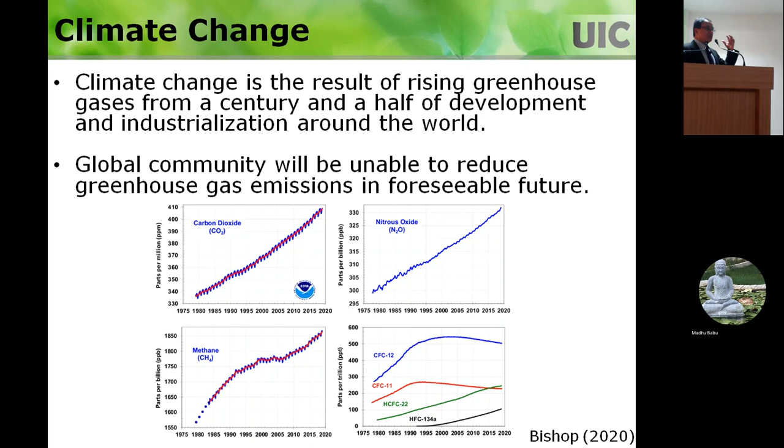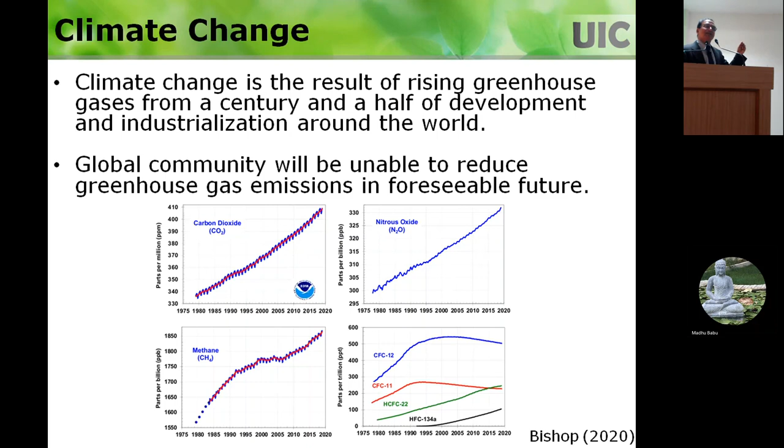The greenhouse gases emitted into the atmosphere are the major problem for this climate change. There's already so much greenhouse gas in the atmosphere that there's no way you can reduce these gases all of a sudden. Even if you shut down all the coal burning power plants and take care of all the dump sites, the existing atmospheric greenhouse gases are going to show impacts for many years to come. So there are two things: if you don't reduce the greenhouse gases, the problem is going to get worse and worse. The greenhouse gases are already very high, and the impacts are going to continue into the future.

So what are the climate change impacts of these greenhouse gases and global warming? These are the problems we're seeing now: sustained changes in average temperatures—some places extremely hot, some places extremely cold. For example, in the last two to three years, the highest temperature ever recorded in some parts of Rajasthan, never recorded before in the history of the planet. You'll see some places extremely hot, some extremely cold, and remember my talk today—in the future you're going to see even higher temperatures than what we're seeing these days.

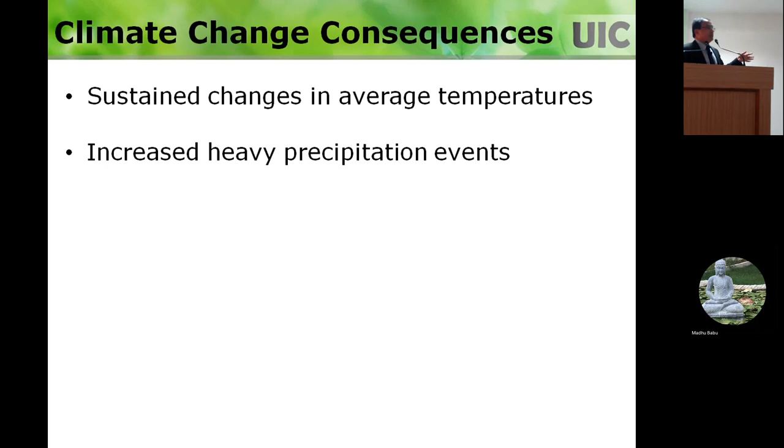The increased heavy precipitation events—you'll see a lot of rain, storms, with higher frequencies and higher intensity. Suddenly the rain comes hard, stops, and keeps on happening like that. These things are happening now, things that never happened before.

Just an example, Hyderabad never flooded, inside the city, never thought it would be flooded. And it happened recently, and many parts of India are getting flooding that was not common at all. So if you're a civil engineer designing something, if you look at the history, there's no precipitation issues, no flooding issues, so you assume that and design it. But now this flooding is becoming common, so as a civil engineer you need to design for these new flooding things that are going to happen.

Increased coastal flooding. People along the coastal area are going to be impacted significantly because of the sea level rise and also the big surge that you're going to have. So lucky that you're not along the coastal area. If you were, I would have advised you to move somewhere inland, sell your property and move. Bhimavaram is one of the areas where it's going to have a lot of impacts in the future.

So in the US, a lot of things are happening along the coastal area. ASCE is thinking, hey, we cannot move a lot of people from coastal areas, what can we do? So ASCE has the vision of having floating cities, cities in the water. Go to the ASCE website, type floating city. They're coming up with a concept into the future. You may have floating cities, where all the buildings are in the water, and all the roads and transportation, everything is underwater. So that's the kind of thing that's coming up into the future.

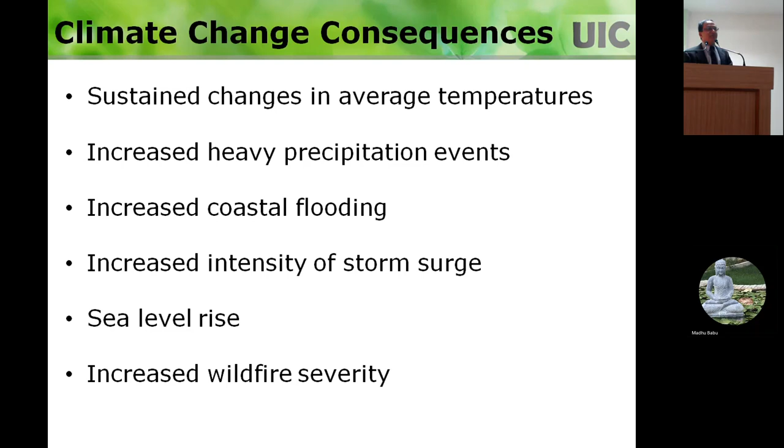Increased intensity of storm surge, as I mentioned, in the coastal areas, the sea level rise. And I don't know if it's common here or not, but in the US, a lot of forests are on fire. Never before have we had so many fires. California, if you have any friends or relatives there, whole California is burning. A lot of expensive houses in these hilly, wooded areas are all getting burned out. So a lot of issues with these things.

So this is the problem. Just to give you an example of what could happen: if you're in a coastal area, the sea level is rising and storm surges are happening, and if you have a roadway along that, it's going to get damaged. So what I'm trying to say is, as a civil engineer, these things are going to happen more and more in the future, and now you need to design for that. Your textbooks don't tell you how to do this. This is something emerging into the future, and we are trying to develop methods that we can use.

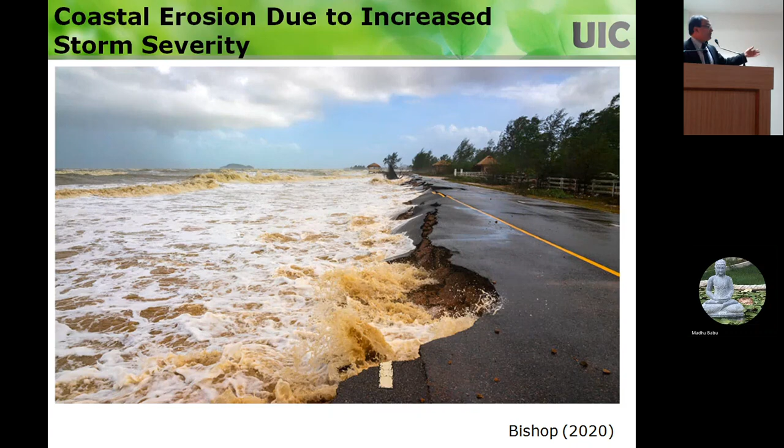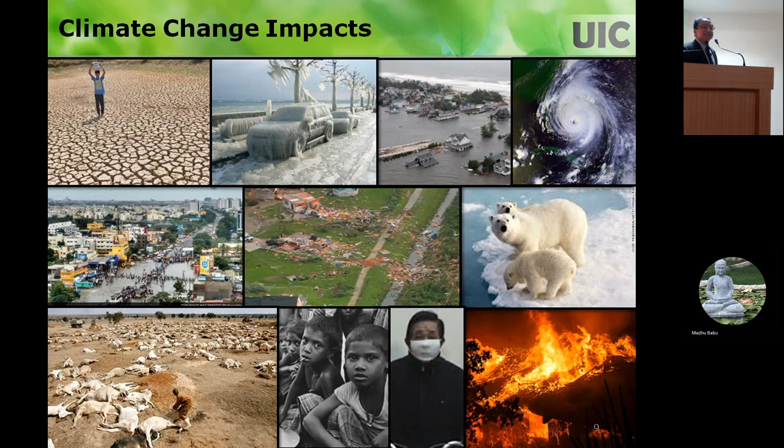So that's why we need to worry about the climate change impacts. I just put some pictures of India — India has to face these climate impacts going into the future. There's Maharashtra, Kerala, Tamil Nadu. In Maharashtra itself, you can see some places extremely dry. So these things are happening — how would a civil engineer design the buildings, design the bridges, design the dams? We really need to do this, otherwise we're going to see a lot of damage.

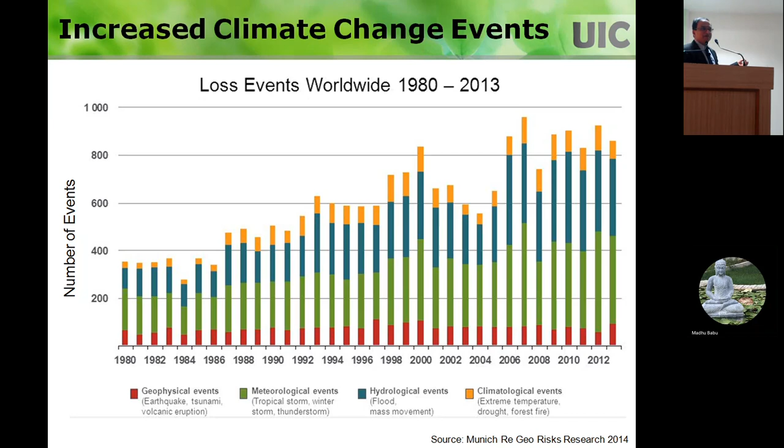If you add up the number of these extreme climate change impact events, they are increasing every year. Even with new data showing even higher numbers, we cannot ignore this. It's not just happening one year and going away, it's continuing to get worse.

When these things happen, there's so much damage, so much financial loss. And if you look at these trends, they keep going up.

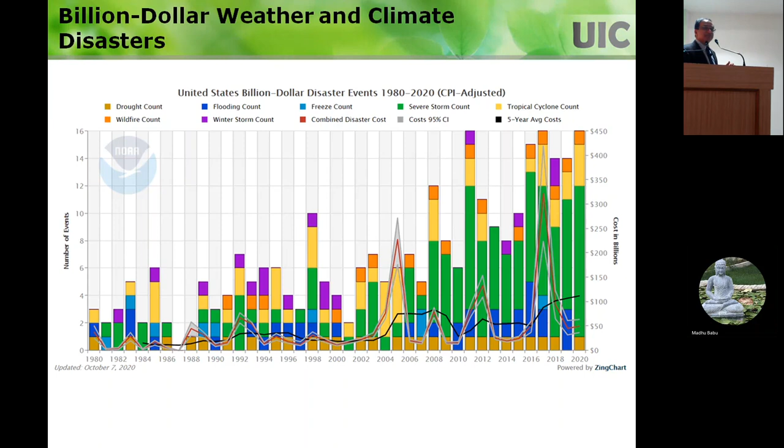If you want to learn more about climate change, the authentic source is the Intergovernmental Panel on Climate Change, IPCC. If you're writing a paper or want more authoritative information on climate change, it comes from the IPCC. They assess the climate situation every 5 years and write a report. This report came out recently - it's the 6th assessment report.

These are all independent scientists. This is not a political agency or a government agency, it works under the UN. The group of scientists collect all the available scientific information and provide a summary of it, showing that the situation is really getting worse.

CO2 concentrations are at their highest, sea level is increasing really fast, the ice is melting really fast, and as a result we are having all these impacts - extreme heat, heavy rainfall, drought, all these things are happening.

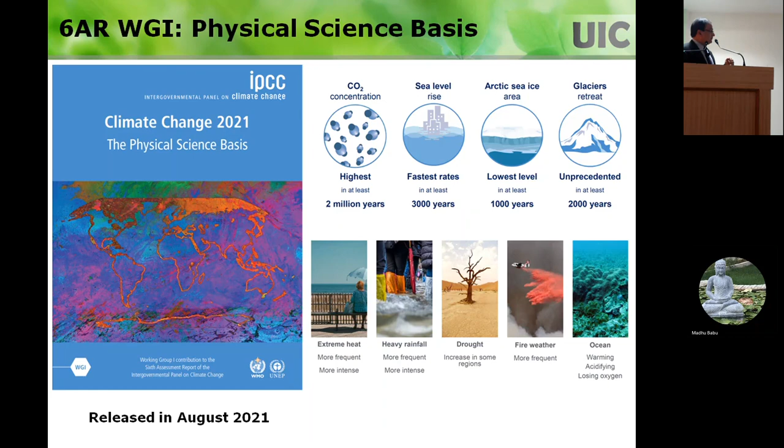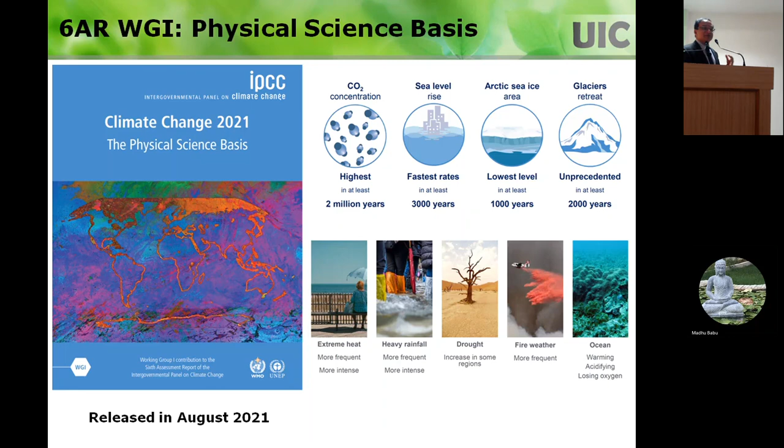If you look at this report, it's depressing. You wonder about your safety, your survival on this planet. This is going to be bad.

They projected what will happen in the future - this shows their predictions, and a lot of people use this as authoritative information. Over time you can see the greenhouse gases are going to increase, and the temperature is going to increase. This temperature increase shouldn't be looked at like daily weather temperature - this is the global average temperature. Even a change of more than 0.5 degrees really creates havoc.

They looked at different scenarios, from a low CO2 emission scenario to a high CO2 scenario. No matter which one you look at, it shows an increasing global warming effect. If you have increased global warming, that means you're going to have more and more of the issues I mentioned. This is really a problem, guys, going into the future.

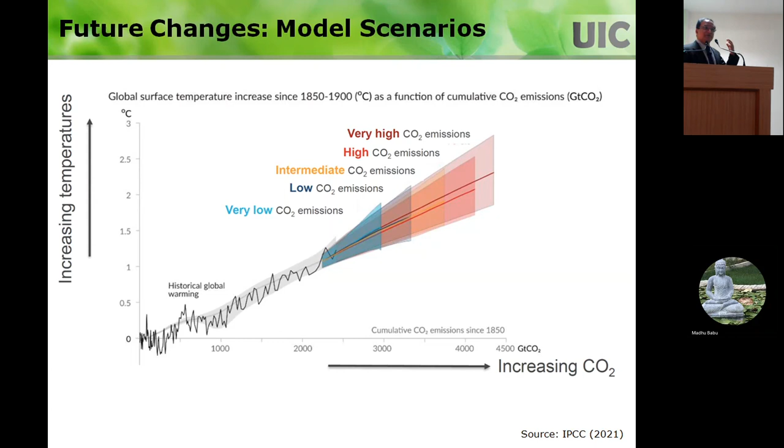It's not just about us - you are going to be forced to tackle these kinds of problems into the future. The IPCC said we need to address the impacts, adapt to vulnerability, and look at addressing the mitigation of climate change. A lot of things have to be done to address this issue.

You've probably heard about sustainability and sustainable development goals. Going into the future, if you want to maintain quality of life for current and future generations, the UN came up with these goals - focusing on gender equality, education, and also climate action. Future sustainable development is not possible if you don't address climate action. This is important, and everybody is trying to work on these things, including climate action.

Hopefully that gave you an idea about climate change, its impacts, and the role of design professionals. Now the question is: if you are a designer and you don't account for these climate changes in your design, what are the implications? What are your liabilities? That's the big question being asked.

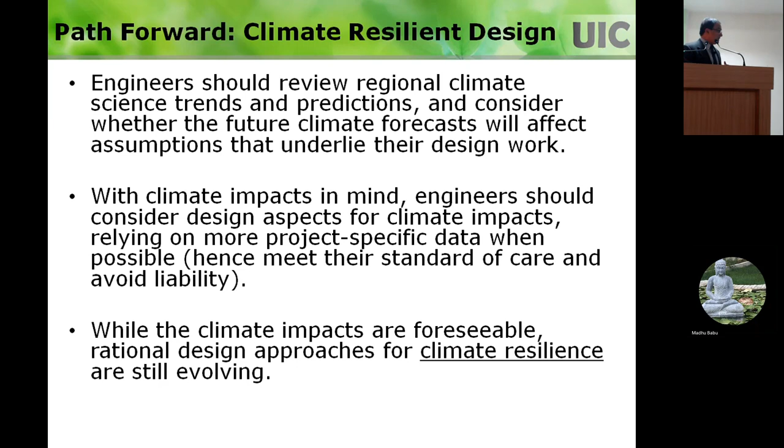And one of the biggest challenges is that these climate impacts have a lot of uncertainty, in terms of what could happen at your site. So this climate resiliency, basically withstanding these climate impacts, is still evolving. So how do I design it, right? So this is the concept of climate resilience, okay?

Just pay attention to this one, because a lot of times we design for performance, okay? This is what we assume - that nothing is changing and the design is performing. But now, if the climate impact happens, let's say there is a climate impact, what happens is you're going to have some damage to your structure. But hopefully you don't want it to collapse completely - if it collapses, then it's really bad. You want to design such a way that after that extreme event recedes, the performance comes back to some level, maybe not necessarily the same level, but a satisfactory level. Ideally, you want it to recover to the same level as the initial level, or even better.

Now the question is, how do we do this? How do we design it? How do you design a building? How do I design a bridge? How do I design a bridge if there is extreme flooding that happens, if there is some damage that happens - how can it come back to its original performance or even better performance than what it was originally designed for? This is what civil engineering professionals are being asked to design.

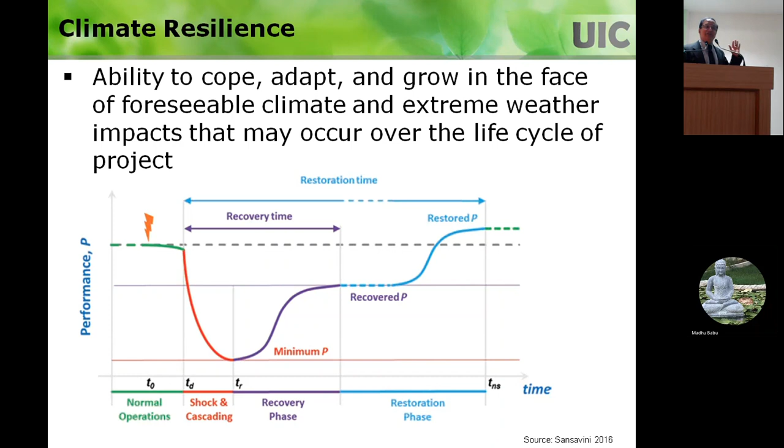How long is the project? These civil engineering projects are long term - 50 years, 100 years. We design a bridge, we think it's going to last for 30, 40, 50 years. So during that time, we need to anticipate what climate impacts are going to happen, and then we need to make sure that our bridge is safe.

So how do we do this? Let's say you want to do the climate resilient design - how do I do this? There's no good framework that has been developed yet, okay? There's no code, no guidance. This is still evolving. So this is one of the frameworks that I proposed some time ago. This is how you follow the procedure: you identify climate change hazards of concern.

Okay, you know the location where you're going to put your project, right? Let's say in your campus, or in Hyderabad, or in Chennai. Each location will have different climate change hazards. In Chennai, I might worry about coastal impacts. In Hyderabad, maybe flooding. So you have to identify exposure to specific climate change hazards of concern, and characterize that exposure. If I have flooding, what kind of problems will I have for my structure? You evaluate the system performance due to the specific climate change impacts you've identified.

It's like when you're designing, you take the load, right? Design load. So this is like, what are the climate impacts that I need to consider in my design? This is called vulnerability assessment. You'll hear this word quite often in climate change designs. You need to really think about what climate impacts are going to happen at the site you're planning to build, and then assess those impacts.

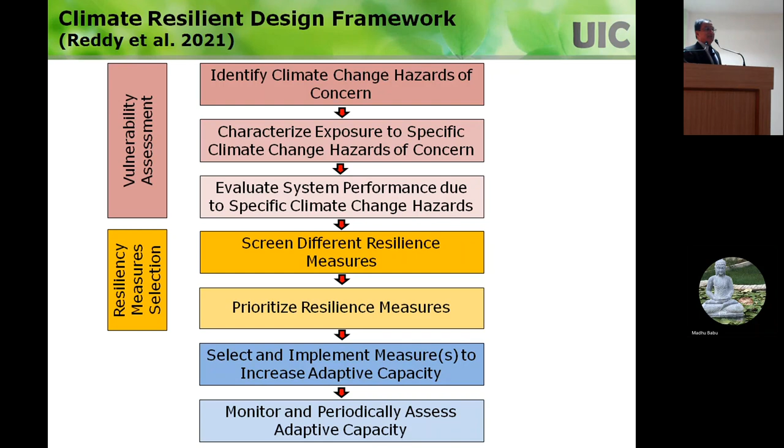And then you implement that. So when you're building, say, a bridge, in addition to the conventional design, you incorporate these resiliency features and increase the adaptive capacity. But there's no guarantee it will perform well, because there's a lot of uncertainty in these climate hazards. Maybe you expected medium level flooding, but there's now much more flooding than expected. So the only solution is you implement remedial strategies based on whatever exposure scenarios you considered, but you keep monitoring it with time, to see if the climate impacts are changing, or if they're less than what you incorporated in your design. This is called adaptive capacity evaluation.

So these are the three things you have to do going into the future to address climate resiliency. All of this requires engagement with the stakeholders. Stakeholders could be public, planners, designers, and owners.

Why do you need this engagement much more than the conventional design approach? Because in this one there is uncertainty and risk. You need to communicate the risk, because you don't want to account for an extreme event that may or may not occur. You don't want to spend a lot of money making your design very conservative, spending unnecessarily. If that thing does not happen, you wasted your money. So you will always design less than the very conservative scenario you think of, but there is a risk.

Risk means the assumption may not be correct. You may have a severe situation, and under that severe situation, you may have more damage. Be prepared to have this kind of damage. That damage could be minimized by periodic monitoring and retrofitting as we go further. So here are those things whatever I mentioned, these are the words about it.

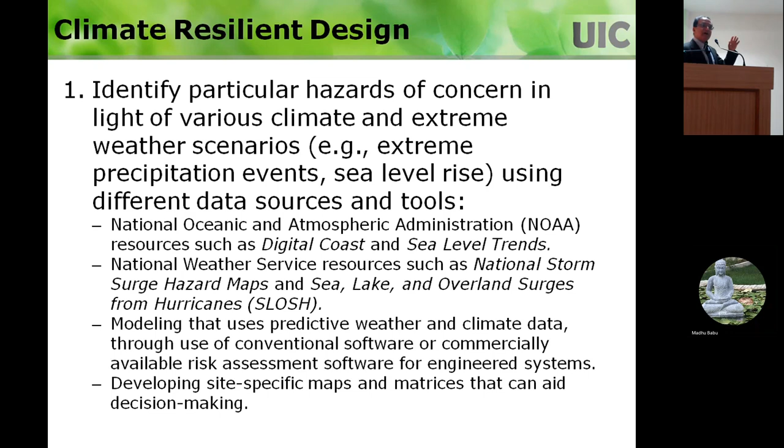How do we do it? One question I want to mention is, how do we find, if I have a location, what kind of climate impacts are going to happen at that location? You need to go into these databases, specify your location, and find information about flooding, sea level rise, or surge protection. There are a lot of resources that can be used to get the information you need. This is not typically done in civil engineering, but we are now forced to address these things.

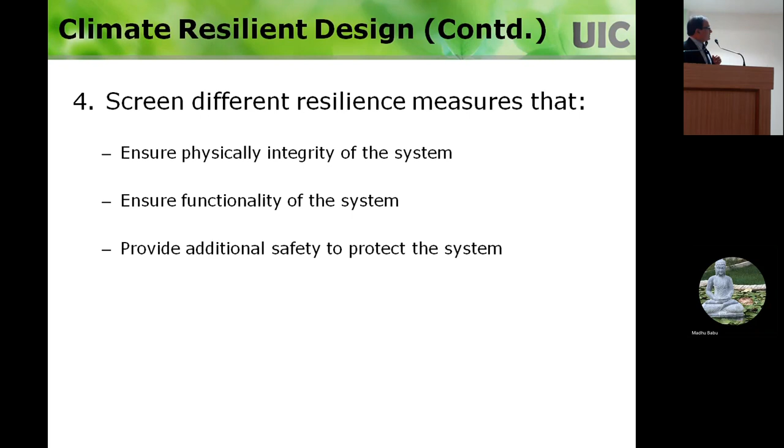So let me just skip some of these things, which are kind of the same as what I mentioned in the flow chart, but then I want to go into case studies.

Okay, I just want to give you some examples so that you can understand how this can be done.

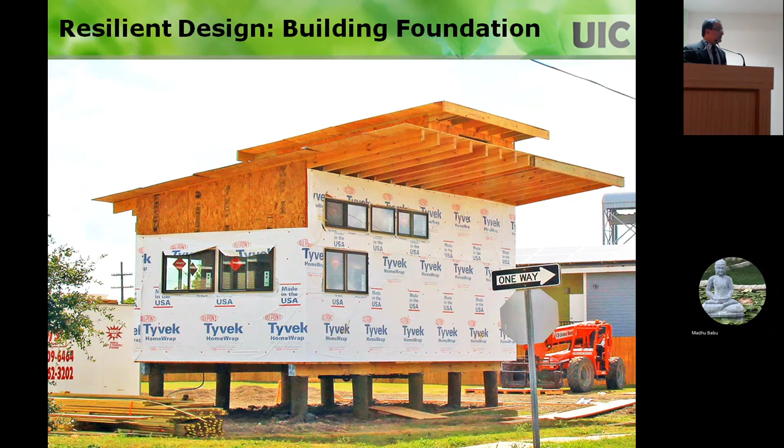So you're trying to address the future impacts now, as a result of this. This is actually built, and also for flooding, you don't want a lot of water accumulating, so there's a lot of emphasis on green infrastructure to infiltrate the water and not allow any accumulation.

So let me give you another example of climate resiliency. In California, there's a train line that goes like this. This has already been designed, and this is what is existing. Look at it, where is it? It's right next to the coastal area. And as I told you, with climate impacts, the water level is going to rise, and you're going to have a surge. They predicted this at this location.

In the future, the train line is going to be inundated with water, it's going to be submerged. How will the train go? So this is what we are thinking about, climate impacts, designing for climate impacts. This is the existing one. How do we address this?

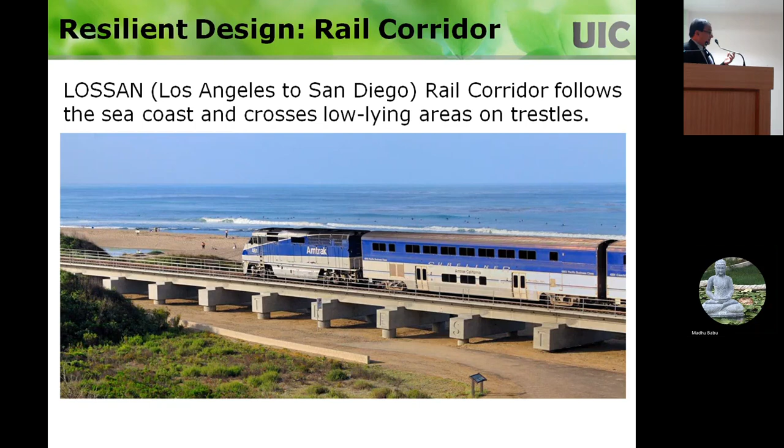You can tear down this one and build another one higher than the expected sea level rise. So we are civil engineers, or creative thinkers, and they came up with this design plan. Right now you have the pile foundations and piers, and this is supporting the track.

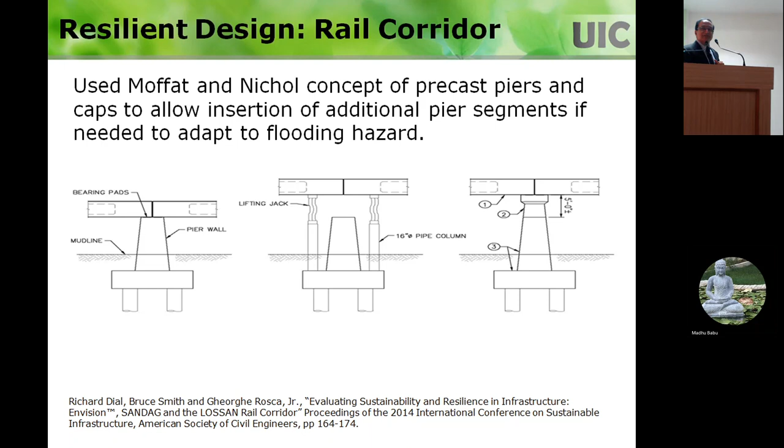So what they want to do is lift the track with jacks like here, and then increase the height of these piers. So instead of being at this height, now it's going to be much higher, higher than the expected sea level rise. So now the train can go on this, and the water level could come all the way here, it doesn't matter. Okay, you guys understand? So that's how we are looking at climate resilient design going into the future.

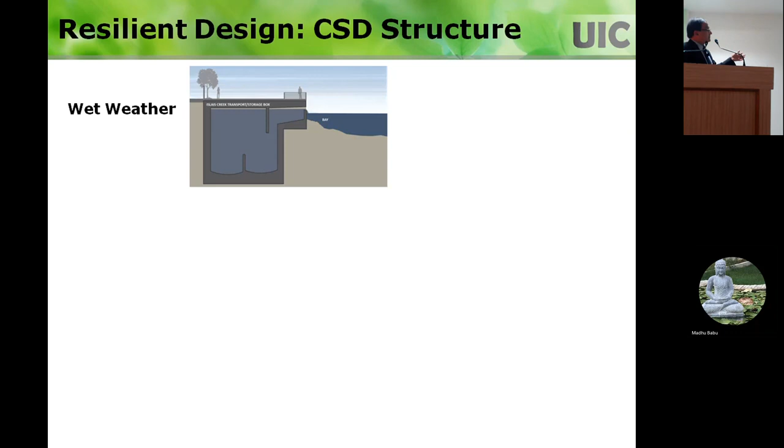Let me show you another example. This is a project being done in San Francisco, California. This is a stormwater project. So you have stormwater, all the rainwater that gets collected in the cities, and they put it into underground pipes.

And then they discharge into the bay. So during the rainy season, there's a lot of water on the roads. They put it into these underground pipes and discharge into the bay. So when it's raining, you're able to address the flooding problems in the city, and discharging into the bay is not a problem. If it's very dry weather, there's no water in the city and no impact on the bay, so there's no issue of water transferring from one location to another.

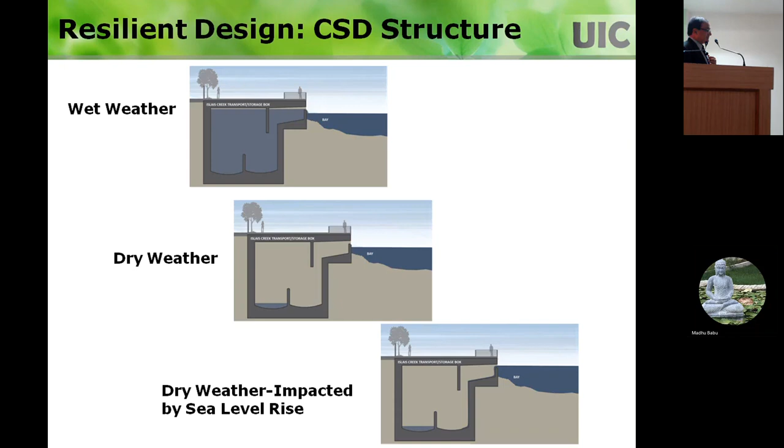So now what they are doing is, when the water level rises here in the bay, the water goes into this system and is stored, and then discharged. So then the water level in the bay will never increase, and it doesn't matter whatever you're doing in the city, because that's not going to be flooded.

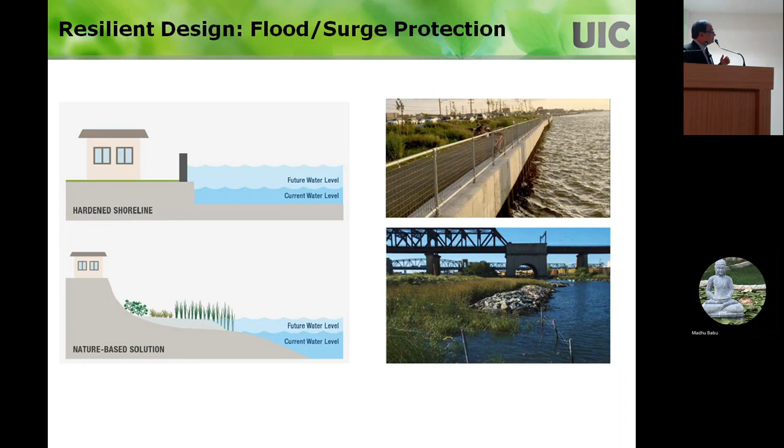So there's a lot of effort now. This is climate resilient design; this other one is not. These kinds of things are going on extensively in the US, and I think other countries will follow soon. As usual, if buildings are close to the coast, they're going to be inundated and suffer a lot. So they are now moving people up-gradient and creating these parks.

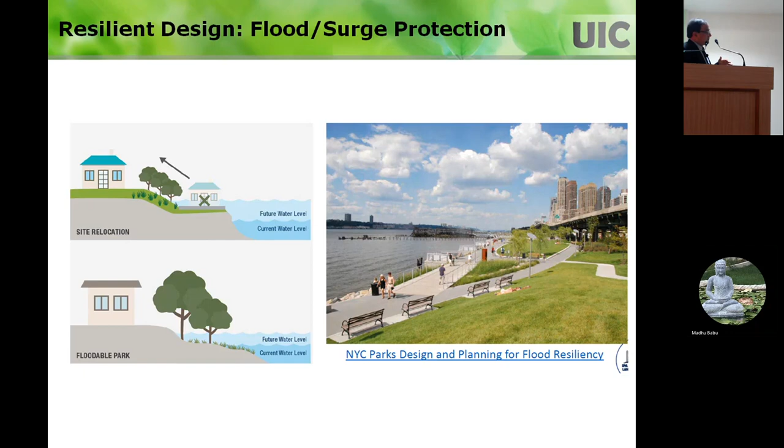And this is the park that they are proposing in New York. You see this one? This is all park. If the sea level rises or there is a surge, this water is going to be in this area. New York has learned hard lessons and wants to do something about this issue. Hurricane Sandy really flooded the entire city, damaging the subways, roadways, houses, computer centers, data centers—everything got damaged because of this unexpected hurricane. They never expected it. Now the city is really planning so these things will never happen again.

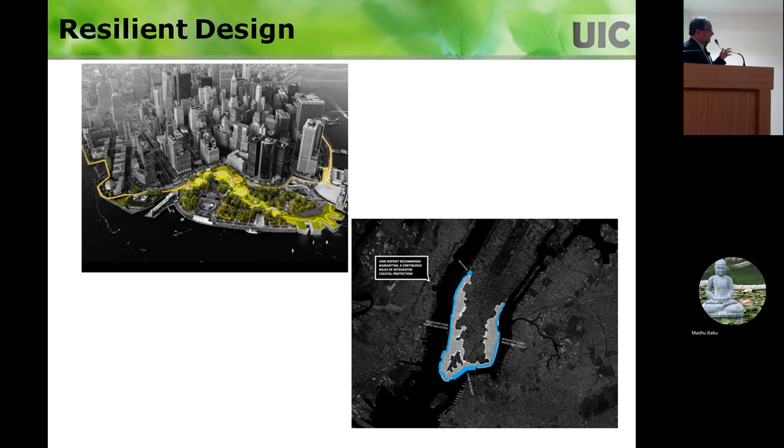With climate change impacts, there's a chance this could happen more often. So they modeled it using different climate scenarios and found that this marked area is vulnerable for flooding. This is where hydrological modeling that civil engineers do comes into use. In that vulnerable area, they are planning to build these parks. They don't want any building in this area, and they want to build these kinds of parks instead.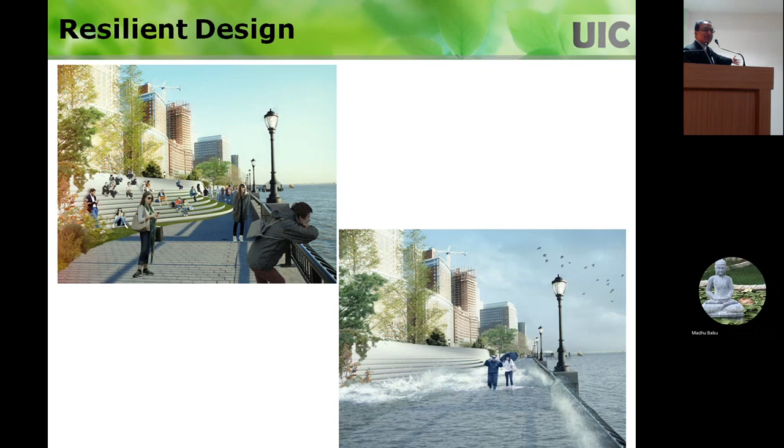So you see this one here. Suddenly, let's say sea level has risen or a surge came. Everybody goes home, right? The water comes here but does not spread to this side, the city side, because this is serving as a retaining system. It's stopping the water from entering the city. You get it? That's the beauty of this one.

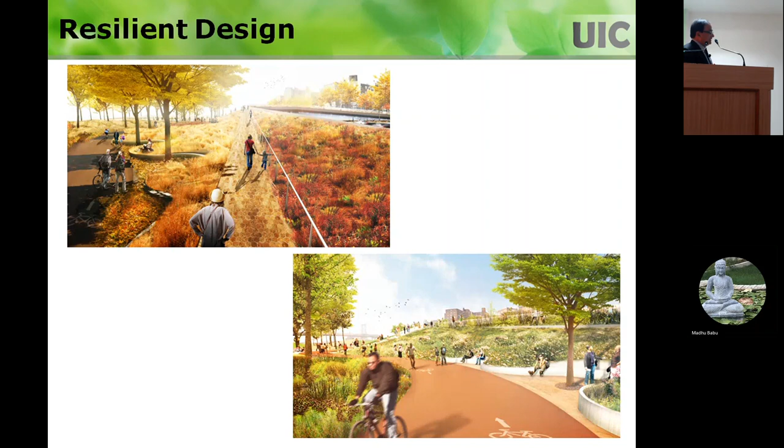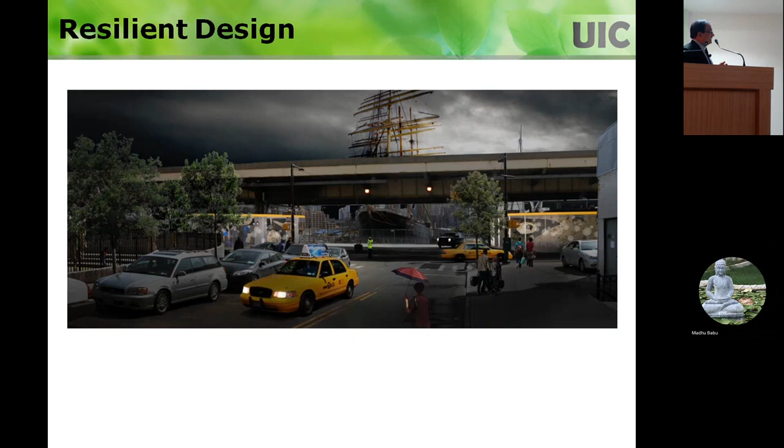Looking at these parks along the coastal areas, there are a lot of them, and you see this height—that's mainly to retain the water if a surge comes or sea level rises. In fact, again in New York, it looks dark here, and they have gates to close off water coming into the city—watertight gates. And look at this one: this is the sea level rise side, this is the city side, and this is the overhead train that goes around.

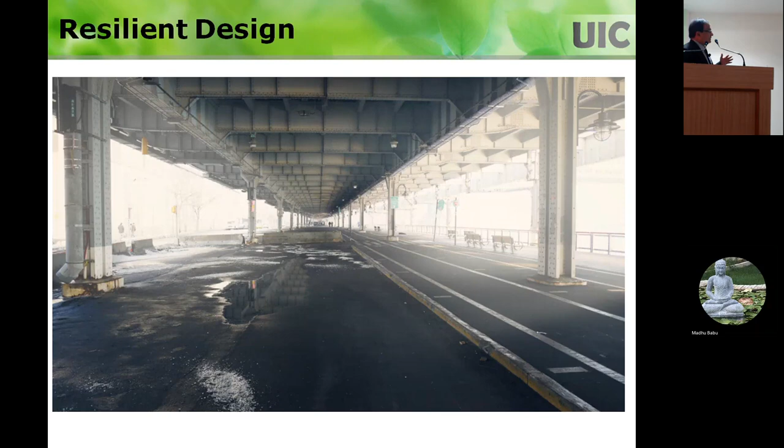Look at this really bad area. Whenever the water level rises here, surge comes up here, this gets water here, and the city gets damaged.

Now this is the plan. They want to convert this whole area that you saw into this, so the public can use it. It's a very nice area to use.

This side is the ocean, and look at what they did on this side, the left side, the city side. They put these stairs. So what happens if there is a sea level rise or slight surge? It gets flooded in this area, and this serves as a containment system. It doesn't allow water to go to the city side.

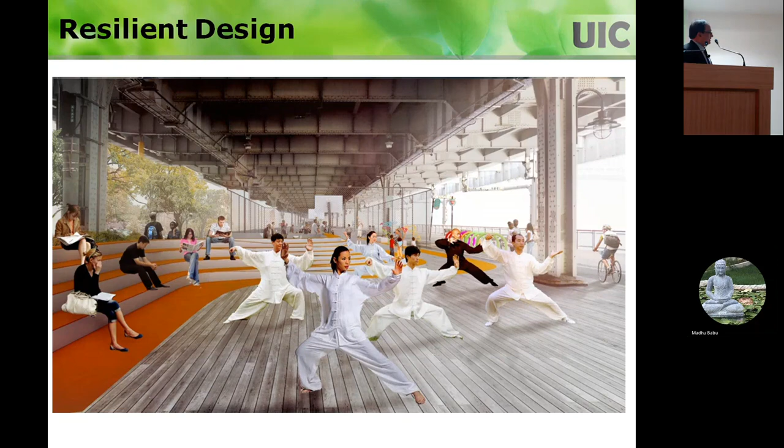And when water comes, everybody goes home, but this protects it. See here, so this is kind of how it happens. Water comes here, and the city is not allowed to flood because this is serving that purpose.

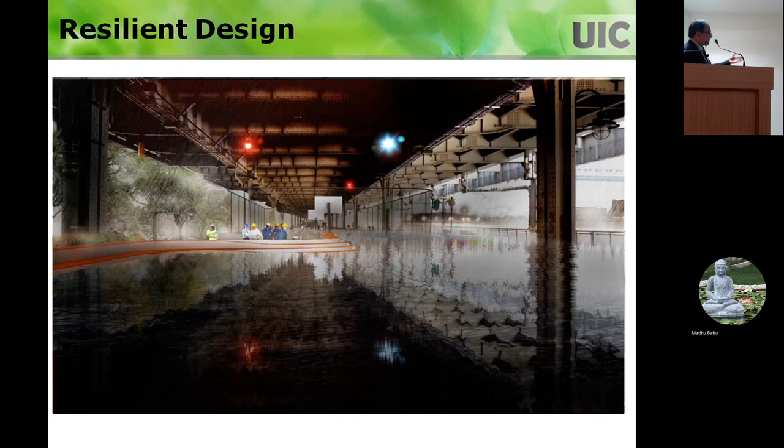In fact, if you want to raise it at the end of this structure, there are hanging walls. You can lift them up and create the additional height that you need, so that if the sea level rise is more than expected or the surge is more than expected, it's covered.

So those are the things that hopefully gave you an idea about what climate resilient design is, and how we should be looking into the future. These kinds of things have to be done everywhere.

And in the US, if you have undergone the difficulties or troubles of these extreme events, you believe in doing something, and the public is ready to spend money on it, right? So I just want to close, this is my last slide.

So just the takeaway points are, we must consider the climate change hazards in infrastructure design. Hopefully in a matter of few years, civil engineers will have some guidance documents, and then we can use those things to teach our students in our classrooms.

But right now, we really need to teach students about these climate impacts that could affect infrastructure. We should be prepared to design our infrastructure for that.

The biggest challenge in this is estimating these extreme events. The science is there, but it's very uncertain in certain things. So you have high variability, and that needs to be addressed.

And there is a lack of consensus-based strategy or standards to assess the vulnerability, and it's difficult to quantify the resiliency. The standard methods, as I mentioned, are not established for climate resilient design.